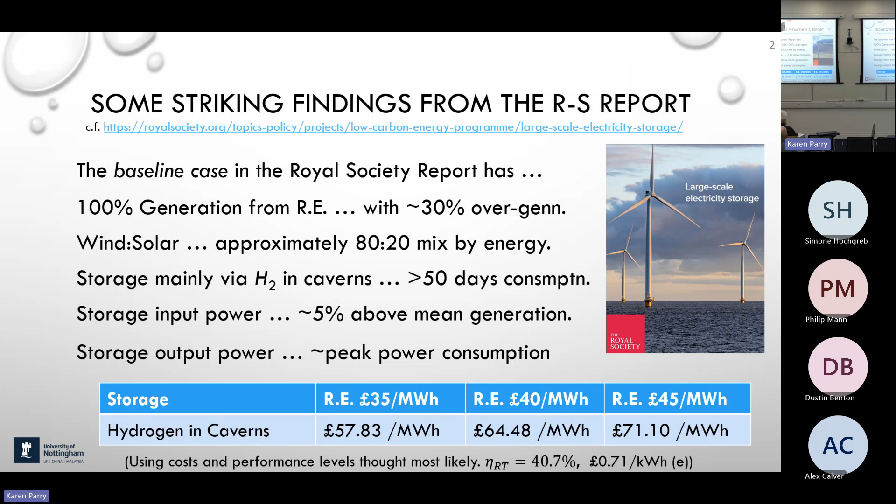I've plagiarized, in the finest traditions of academic life, 2 graphs directly from the report, because these are very succinct in explaining the relatively simple matter of why you need so much hydrogen storage. It's really got to do with inter-year, and Chris would say interdecadal, variability of wind resource. The slides will all be available, by the way, and these are plagiarized directly from the report, so feel free to photograph whatever you like.

So the first one is a version of the shortfall or excess year by year if you had scaled up supplies to be suitable for 570 terawatt hours per year of consumption. And the second one shows you the state of fill of the hydrogen store.

This is really insightful because the hydrogen store, first of all, stays full most of the time. That's quite an interesting thing, because what that tells you is that a lot of the time you are actually not able to put more energy into it, and therefore turnaround efficiency is less sensitive than you might think. Secondly, this is Chris's own writing, there's a very big gap between the time when you must fill up a store and the time when you must empty it again, potentially, for some of the bulk of that capacity.

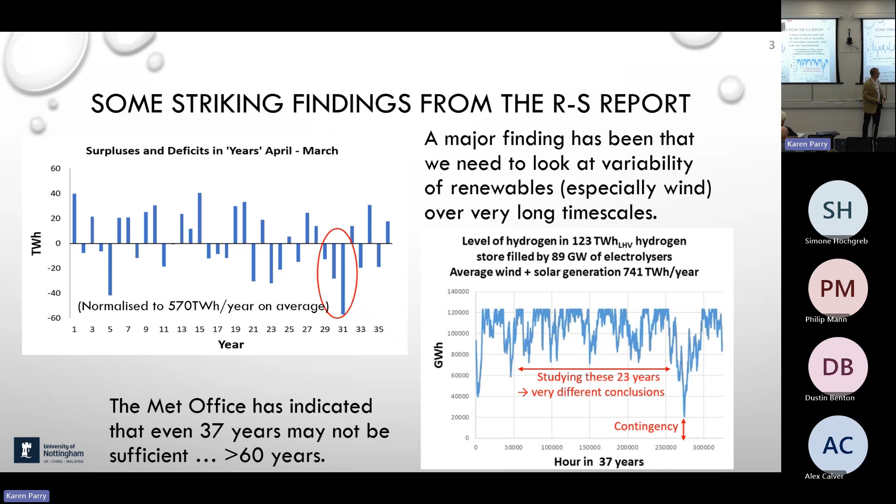So that's easy stuff, and that's from the Royal Society report. And if you say, so what? Well, the utterly obvious fact is the UK should already be preparing a large amount of salt cavern storage for hydrogen. It isn't. It's so incredibly simple to explain that, but it isn't happening. So that's unfortunate. We should be preparing for several gigawatts worth of electrolyzers and hydrogen-fired engines, or some other way to convert hydrogen into electricity, and we're not. Although there are intentions of 5 gigawatts by some target date, I can't remember that.

And the above two are not only essential, but they are no regrets. So even if we're not right about many of the aspects of cost and performance, there's almost no probability that these things will lead to regret. So we should just be doing them. And with that, I could stop there, and Chris would be happy if I did. You could say that's the answer. In my opinion, that's a part of the answer.

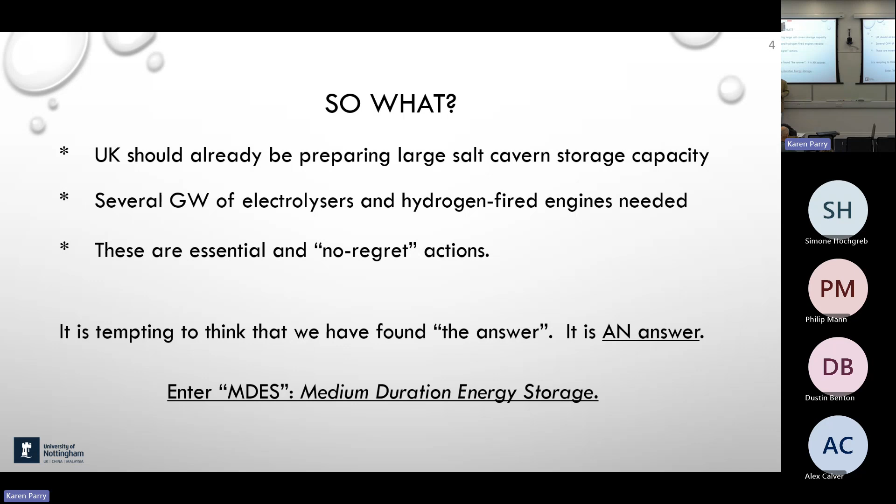The rest of this talk is about how you can make the answer better. Fundamentally, there's no point in making the answer better until you've got that message across first, which is where we're at right now, struggling to get that message across. However, I want to focus mainly on how you can make it even better than that.

This graph is what I hope people will recognize in a couple of decades' time as my signature graph. It doesn't have any numbers on the axes, and it's got very strange units. Along the bottom axis is the log base 2 of discharge duration, measured in whatever units you like, seconds let's say. The thing to note about energy storage is that the range of discharge durations relevant to us is colossal, bigger than any other dynamic range we commonly come across. It goes from seconds up to a couple of years.

I think it doesn't go beyond a couple of years, because if you think about timescales longer than that, you could just build more stuff. And if you think about things shorter than seconds, things like inertia and spinning rotors automatically sort that out. They're relatively simple, local effects, and you don't have to worry about them. But the ratio between a second and a couple of years is about 2 to the power of 26 — absolutely colossal.

On the vertical axis, there's a unit that's particularly difficult to explain. I won't attempt to unpack it completely, but it's the cost per semitone. If you're a musical person, you'll realize that a semitone is the 12th root of 2 increase in frequency. Because frequency has an inverse relationship to time, you can think about semitones in time as well, being a factor of 2 to the power of 1/12 more. So if we started with 1 second as the lowest discharge duration, we can go up to 2 to the power of 1/12 seconds, and so forth, et cetera.

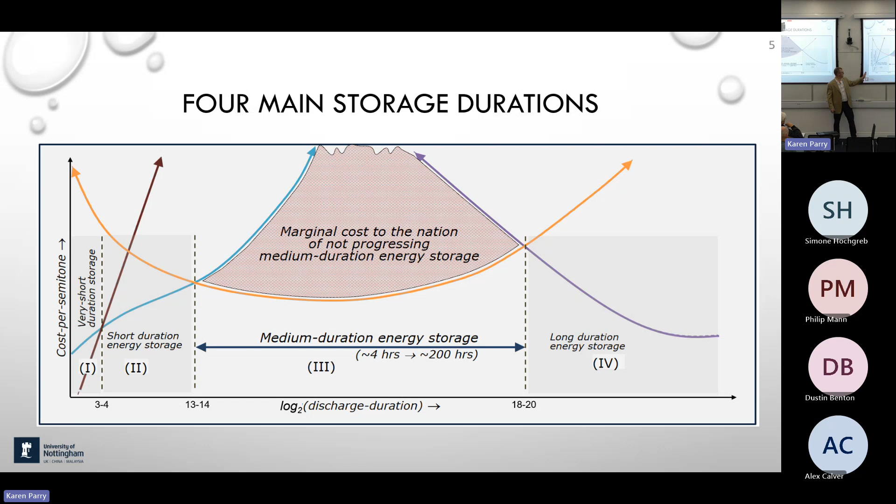In the middle between long and short is a whole set of times where actually you can address these using hydrogen if you want, but it's not a good solution because the cost per unit power is high and the turnaround losses are terrible. You can also address them using batteries, but they're not a good solution either, because the cost per unit energy storage capacity is too high using batteries. So there's a whole space here, and I want to mainly impress upon you how big that space is and how important it is.

Essentially, there are 3 sections in this talk — after that was the preface. The first one: I want to tell you about the distribution of energy that will come out of storage. You can chop it up according to the periods of continuous discharge from storage — that's the first message. The second one: I want to tell you about a tool that I wrote, first of all, to support the Royal Society report, and then thought, well, actually, I could tart it up and make it suitable for people to use independently of me. I wrote it for me to use in the first instance, but then I realized it's not hard to make other people able to use it.

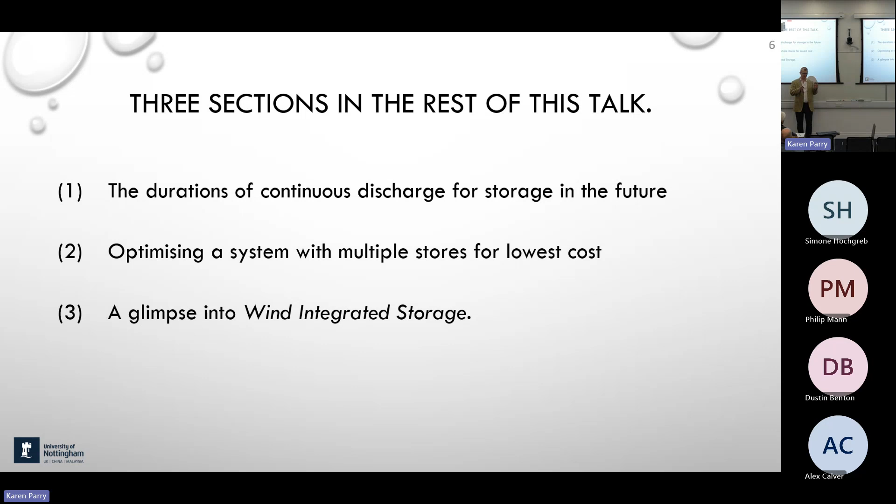And the final one, if I get this far without running out of time and interest, I want to tell you about my passion, which is one of those personality disorder issues: integrating energy storage right into wind turbines. And you're guessing what that means, and you're wrong.

It's similar to a graph, obviously not that one because of the years, but it's 10 years of what I call net demand. Net demand is what you get when you scale up the supply coming from wind and solar power, such that the amount of energy produced from the supply is a bit more than demand—in this case, 10% more. I call that 10% overcapacity. Then you subtract demand from that, and what you're left with is net demand, which is sometimes positive and sometimes negative.

So far, so good. In this case, because there's overcapacity, it has to be on average negative, because we're generally producing more than we need to draw out. We assume for the moment that energy storage is 100% efficient, just to get a rough idea about the shape of the problem we're addressing.

I want to focus on the positive bumps, the positive half cycles, not the negative ones. The positive half cycles are when energy is coming out of storage—that's when it's valuable. The negative half cycles are when you're putting energy into storage, and by definition, some people call it excess. I hate the term, but it's less valuable when it's going in. So the area we ought to focus on is this stuff that's coming out.

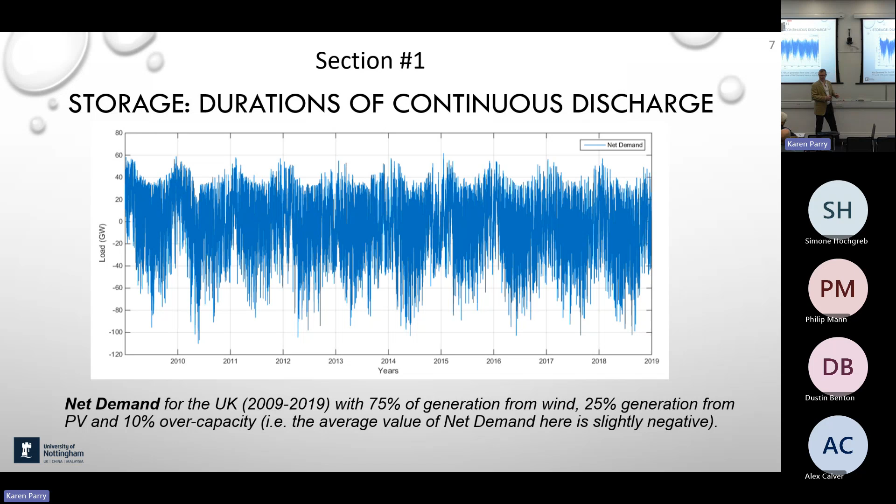You can do a very simple operation on that: zoom in on the graph and look at every place where net demand is positive, and ask how long did it stay positive for continuously. Each one of those bumps can then be categorized according to how long it lasted. It's quite remarkable what you find if you analyze how much of that energy came out in bumps shorter than 4 hours—less than 1%.

So the duty that falls most naturally to batteries appears to be less than 1% of all the energy that comes out of storage in that picture. Then look at the other end of the spectrum: how much comes out in periods that are continuously short for more than 200 hours, which is about a week, so 8 days—it's about 7%.

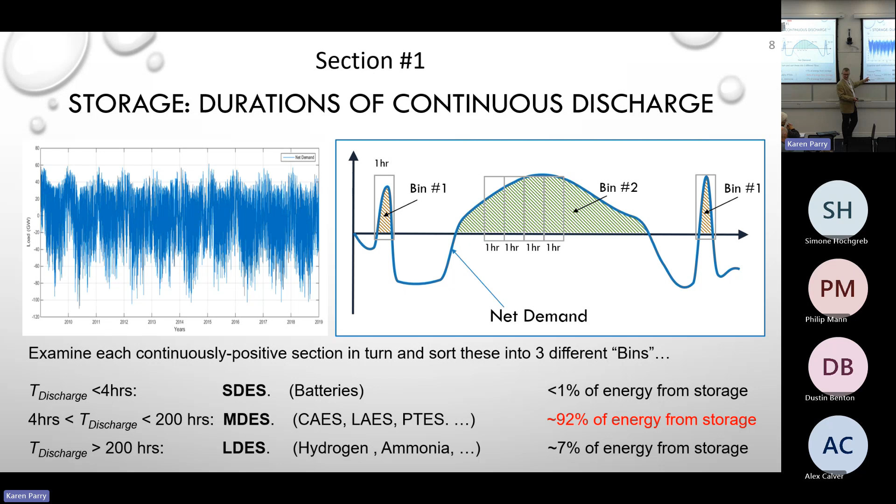That's quite surprising, but we get this word now commonly accepted by all of us, Dunkelflaute, a German word. A Dunkelflaute is basically something about 8 days long, 4 to 8 days long—a period of cold weather and no wind. We had one, actually we've just lived through one. And in the middle, all the action is in this medium duration range. That's a kind of interesting observation.

You can take that a little further and say, well, instead of dividing it up into 3 bins, I can chop it up into semitones if I want, as I proposed earlier on. This is it on a linear scale, giving you a probability density function, indicating for any 1 kilowatt hour that came out of storage, what is the probability it came out within a period of continuous discharge of a certain range.

Perhaps not surprisingly, you find a bump at around 12 hours, and that's because there's quite a bit of solar in this. You quite likely have a period of solar where you definitely don't need anything coming out of storage, then a period when you do, then solar kicks in again. So it's not surprising we have that.

I was puzzled initially by these—looked like harmonics of that—but it's actually quite easy to understand. If you ran short of electricity for 24 hours, you'll almost certainly run short for 36, because you'll be through to the next period when the sun isn't shining.

So there is actually quite a logical explanation for why these humps turn up, and effectively that just reinforces the message. You can put the boundaries on here. There's 200 hours and there's 4 hours.

I much prefer to present it now in a logarithmic scale. So you can think about these as the log of discharge time, and that is the probability density per semitone, if you want. In effect, what I've done is taken every vertical slice out in here, multiplied its magnitude, its height, by the average time.

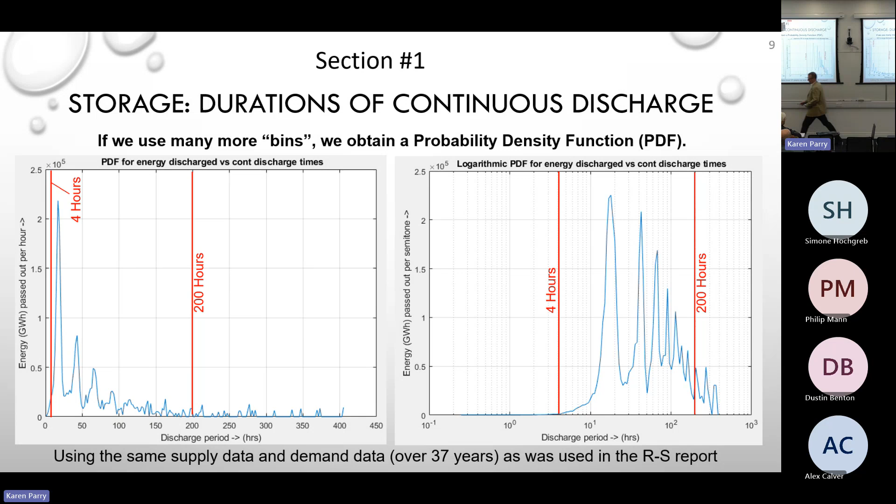So that's the end of section 1, and this is my imaginary friend Jim, and I'm putting words into his mouth. He's saying most of the energy supplied by storage in net zero UK will emerge in periods of discharge in this medium duration range. And he quite rightly tells me back that this doesn't mean that you should necessarily supply all of that from medium duration storage. You could do it with hydrogen and batteries.

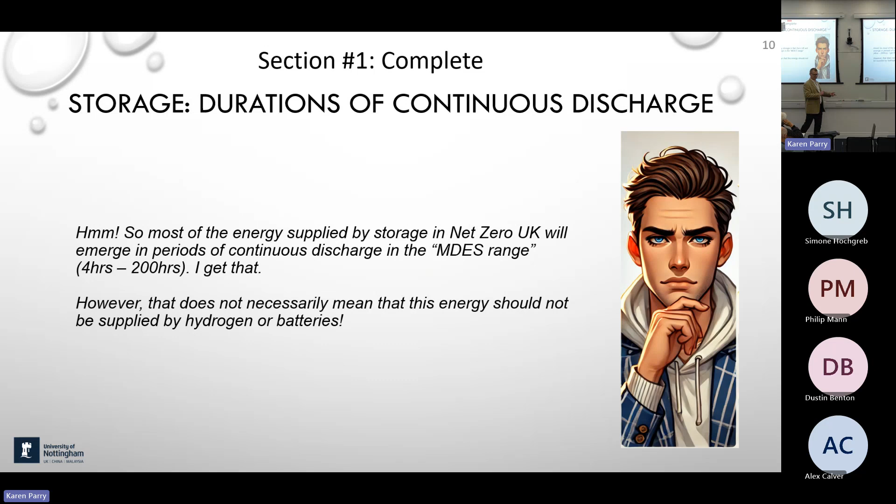So section 2: how do you go about optimizing a system that has multiple stores in it then? This is that piece of code that I told you about. I wrote a piece of code, I call it NStore Sim, for a very simple reason, that it's all about simulating a system that has N stores in it, multiple stores in it. And it's open source in not the proper way, but you can copy it and use it.

It's written in MATLAB and it's available at that link. It's a set of MATLAB functions with some example main scripts showing you how to use them, and some explanation videos. And at the core of it all is the idea that you can describe your system using a vector of parameters.

Which to you is going to say, how much hydrogen storage have I got in terawatt hours? How much electrolyzer capacity have I got? How much engines have I got to convert back out again? And then the same thing for other stores, that forms a vector.

And then you can calculate the cost, the minimum cost of the system that will work with that vector if there is one. As long as you pick sensible numbers in here, there will be a way to make that system work. You can calculate the minimum cost.

And if you can do that, you can throw it into a dumb optimization tool, which is in MATLAB, and it will crunch - for a conversation we were having yesterday, day before - it'll crunch for 2 days on a laptop and say, oh, here's the best you can do. So this is what NStore Sim does.

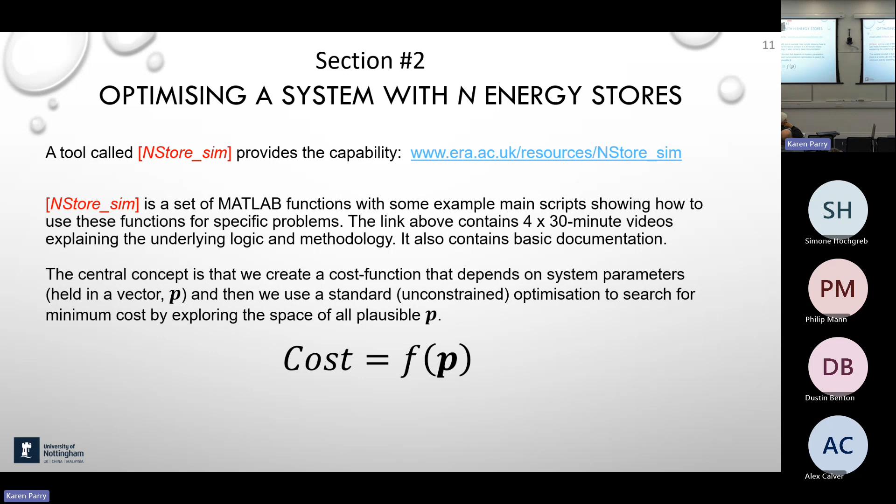You have to, for each type of energy store, tell it these things. What does 1 unit of input power cost? So cost per kilowatt. What does 1 unit of output power cost? What does 1 unit of storage capacity cost? And how efficient is it in round trip?

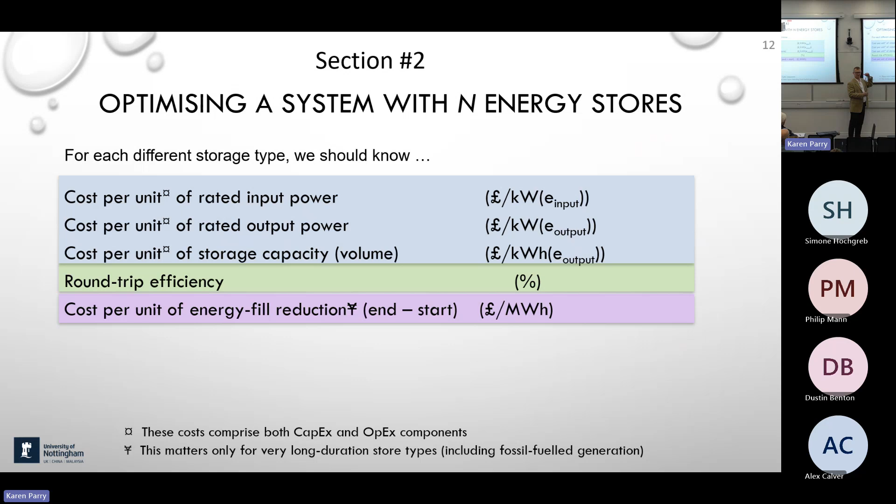And I don't care what it does inside. If I know these numbers, that to me describes it perfectly well for present purposes. And very importantly, you have to attach a cost to the difference between the state of charge at the end and the state of charge at the beginning. Because if you don't do that, you must constrain yourself to bring it back where it started. And that turns out to be quite an important freedom to have, to not require it to go back where it started. So that's broadly the information you need.

I'm going to show you how it works with a single energy storage system. You have, for a single energy storage system, 4 variables, but only 3 of them are independent. So there are 3 variables that are independent, and then there's 1 that's dependent. You can tell it how big is the storage input power.

You can tell it how big the storage input power is, how big the output power is, and how big the store itself is in volume terms. Then it can calculate, given those three things, how much overcapacity you need to supply all of the demand. If you make your stores very small, or low input power, low output power, and low capacity, you're likely to require a vast amount of overgeneration, possibly an outlandish amount. But as long as you make reasonable estimates, starting from a reasonable point, it will find a value of X such that the system works.

So far, so good. If I say I'm going to have 10 terawatt hours of storage, 30 gigawatts of input power, 40 gigawatts of output power, it might well be that some of that 40 gigawatts of output power could even be unnecessary. It's oblivious to whether it's necessary or not. It will say, in order to make this system work, you have to overgenerate by 25%, 30%, 40%, whatever the number is.

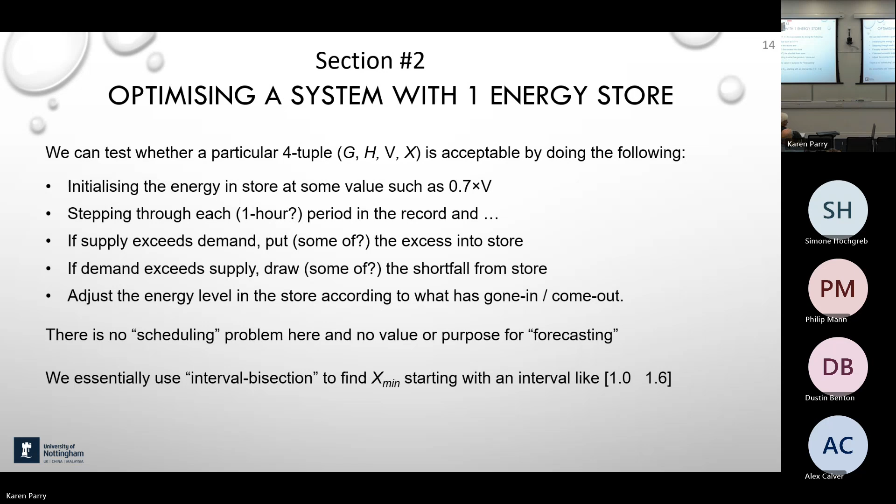So Chris basically did the same calculation that I did, but in a different way - a manual version of this for the single store case. This is the NStore sim version of the same thing, and actually these graphs look very similar, though they've got the axes flipped. But the NStore sim case enables you to deal with the multi-store case.

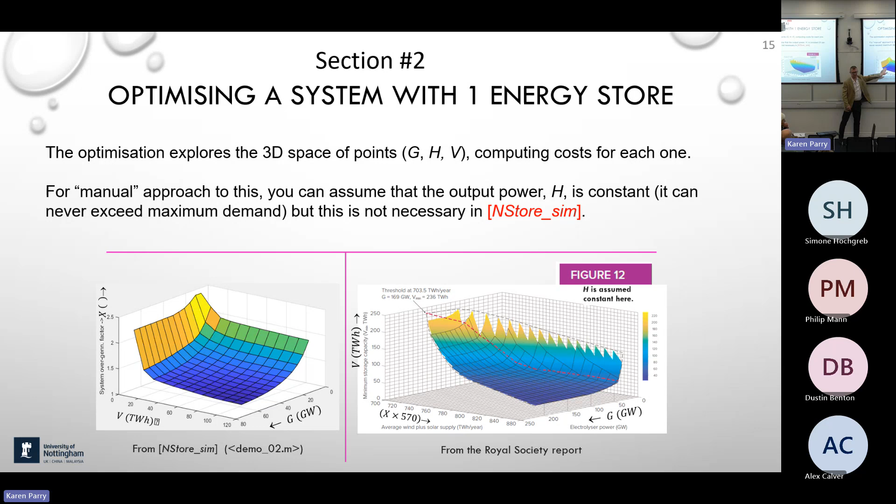And the extension to two or more stores is really quite simple. Instead of one value for input power, now you've got two - G1 and G2. Instead of one value for output power, there are two. Instead of one storage volume, there are two.

There's still only one overgeneration factor. These are the independent variables. You can set these, and then the simulation will calculate the minimum value of overgeneration needed. And nearly always it can find some value that'll be sensible.

And then it will calculate the cost. Since it can do that, you can go through the process of exploring the space, turn G1 up a bit, turn G2 down a bit, etc. You don't play any part in that. It's just dumb optimization, with no other need, as it happens.

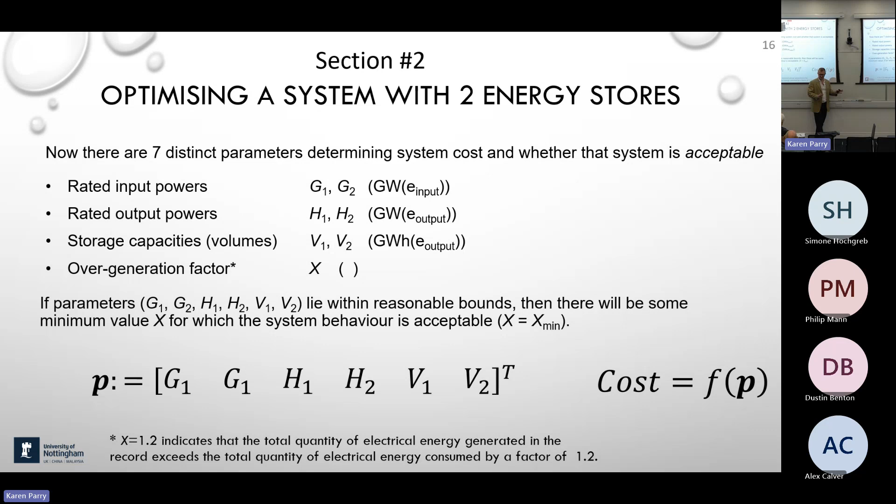This is how you test whether a particular 7-tuple, a set of 7 numbers in a particular order, works. It's very similar to testing whether a single store works, but there's a slight difference. You initialize as before with each store about 70% full, and step through every hour of the period as you would have done before.

If supply exceeds demand, you put some of the excess into store, but which one? And if demand exceeds supply, you draw energy out of store, but which one? So the difference is you now have a scheduling problem. You have to decide which store to supply preferentially or withdraw from preferentially. And there is a very simple version of that.

Use the most efficient stores as much as you can. That indeed was both Chris's initiative and instinct, and mine. And it's not right. It's not right, because if you do that, you'll take the most efficient store, and if you're short of energy, you'll empty it.

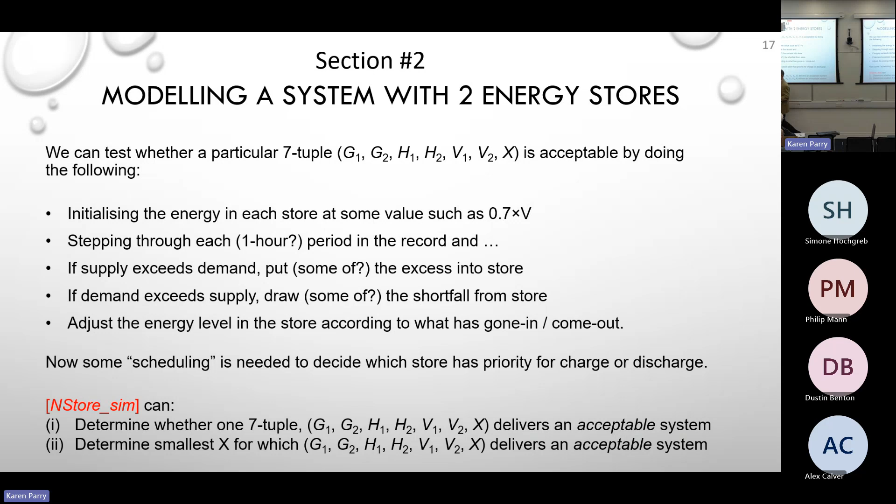Once it's empty, its output power is no longer in the game. You can't use that output power because it can't deliver you any more energy. So it's actually best to try to avoid emptying it, bring it down of course, but when you get to about 15% from empty, then try to use a less efficient store so that you keep that output power in play. And that's been formalized into an algorithm, because I've more or less explained it.

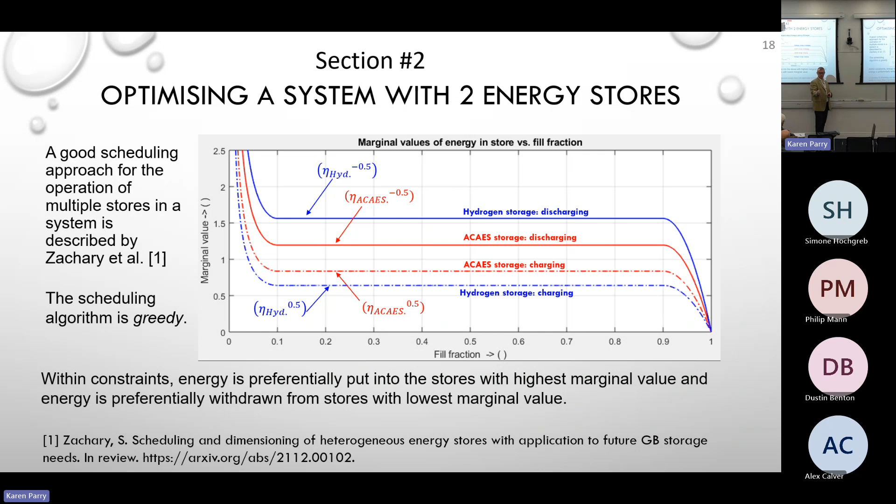And so here, when it gets down to about this empty, all of a sudden it's better to take energy out of hydrogen. It's just a formal way to make sure that you try to stay away from the buffers. It's like driving a bumper car around in a rink and trying not to hit the boundary, because if you hit the boundary, the power goes out of play, and you want to keep the power in play.

So that works, it's been implemented, and then you can start to think about grand ambitions. How do I optimize a system with n stores in it? Now you've got as many parameters as you want. All that happens is the compute time goes up. It's absolutely no more challenging to do it for 5 stores, or 6 stores, or 7 stores. For me, it just takes my laptop longer, and it's still a laptop job.

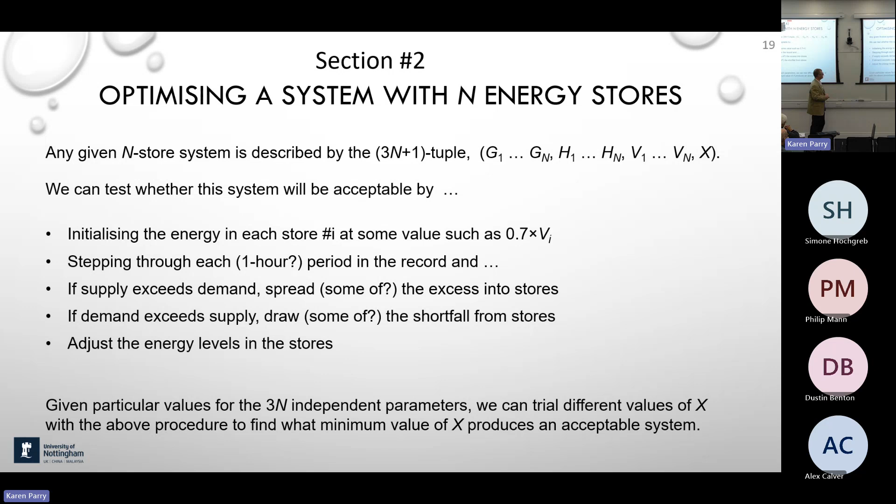You can still do this all very simply. It's the same routine that you had before. You initialize each store with about 70% fill, step through each 1-hour period in the record, and then, well, if supply exceeds demand, you do your scheduling. You say, which store do I put this into? And if it's the other way around, you say, which store do I take it out of? And you march your way through time.

So you wrap all this together, and it actually turns out to be very revealing. Here's a few conclusions from looking at that. I haven't presented all the numbers, I've just picked out some conclusions.

The first one: the blend of wind and solar matters a lot. There's a huge amount of misunderstanding with people using the word seasonal. The problem is not winter versus summer. This is greatly misunderstood. People think we need more energy in the winter - that's true, but that is not the driver for big energy storage, because the wind blows more in winter. So if we blend wind and solar properly, we already have approximately a year-round balance.

The big issue is the inter-year issue. If you get the right blend, 80-20, to make the seasons right, that's good in terms of not having a seasonal imbalance, but you're actually potentially pumping up the level of wind, and you're pumping up the level of interannual variability. So in actual fact, your best bet intuitively is to start by balancing the seasons first, and then back off a little bit on the wind, so you get a bit less year-to-year variability. That's the first interesting conclusion, I think.

You can examine whether nuclear power has a role, and Chris and I have come to a form of words that explains the conclusion here. It is almost a theorem. I thought initially that I could prove that if you postulated a system that ran only on renewables, and calculated that it could deliver power at 65 pounds per megawatt hour, let's say, then it was a theorem that if nuclear power cannot do that, it has no place. It turns out that you can contrive exceptions to that. It's a very good benchmark, but it's not a theorem. It gives you a very, very good benchmark.

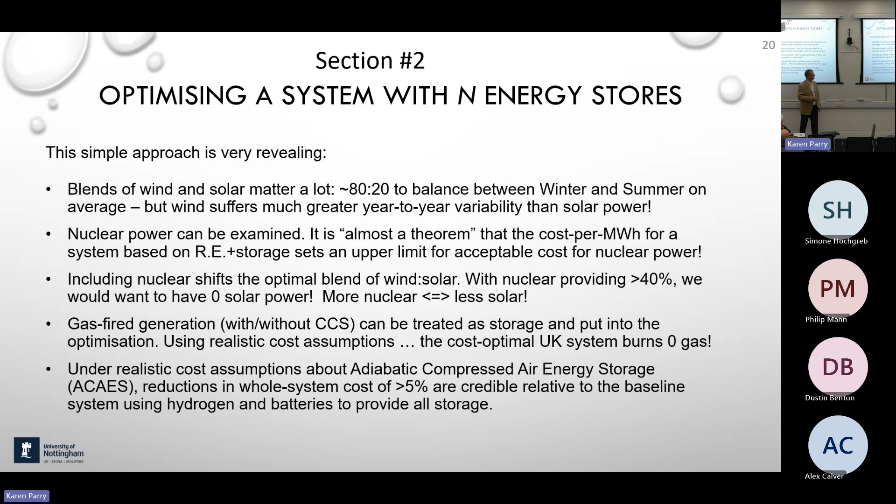We both tried very hard to find a simple answer to a simple question: how much is a compressor? How much is a 250 megawatt compressor? That shouldn't be hard to answer. It turns out that is hard to answer. We got the answer for electrolyzers within a factor of 3, and the answer for compressors has a factor of 10 associated with it. We could be very confident it won't get cheaper than £60 per kilowatt, and very confident it won't be more than £600 per kilowatt. But there's a very wide spread, and the reason for that really is because at the moment they're made as bespoke items - there's no industry for making 250 megawatt compressors as a standard object. And there's less uncertainty around the efficiency that you'll achieve with this.

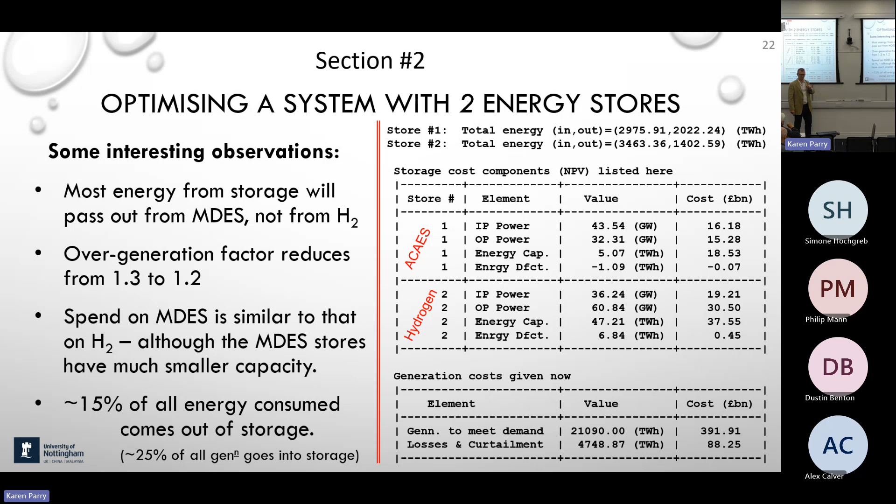And this, for part 3, this is really important. About 15% of all the energy that gets consumed has come out of storage. That means that about 25% of all the energy generated went into storage. That's a very key point because a lot of that energy came from wind power. And it sets me up very nicely for the final bit.

So here's Jim again, and this is Jim's observation: the cost optimization outcomes do seem to suggest that there could be a good role for MDES. But it's a pity about a high degree of uncertainty on costs and performance, costs particularly. And actually, I'm not sure if I've written a conclusion specifically about that. I do think that may be the biggest single area where more research is needed, because how do you determine how much a 250 megawatt compressor would cost if you were to be building 10 gigawatts of them?

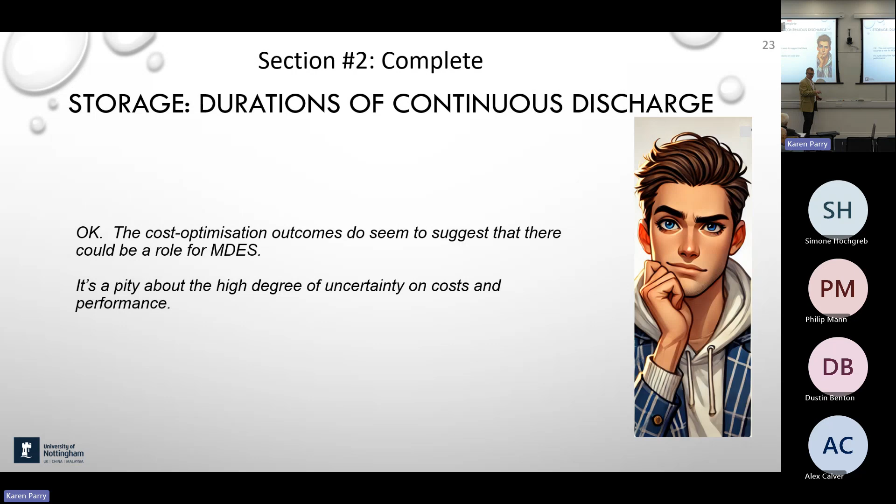There's no established procedure by which at the moment you can determine that. And I think if we knew the truth, it should be very influential on what we do. Right, so this is the final little bit, and I'm indulging myself here. I might curtail myself before the end, to use the analogy.

There's a few different varieties here, this is about wind integrated storage and some other varieties of medium duration storage. So I've mentioned medium duration storage, and there are quite a few technologies that could slot into that, most of which will be familiar to you. Flow batteries, everyone's heard of - it's 2 tanks of electrolytes that you flow in and flow back out again. The more tanks you have, or the bigger the tanks, the more capacity you can make. So you can separate the energy storage capacity from the power. That's a good thing, but they tend to be suitable for the bottom end, I would say, of medium duration energy storage. Still a relatively high cost per unit energy, so more focused down towards the bottom end.

And then all the rest of these are mechanical things, which is pointed out at the side. Pumped hydro, everyone knows - we've got a plant proposed in Scotland called Coire Glas that's been talked about for yonks. Pumped hydro is very, very mature, it's very good technology, it will last for centuries - which is a critical issue. I mean, all of these technologies will last a long time by comparison with electrolyzers and batteries, I would say, probably.

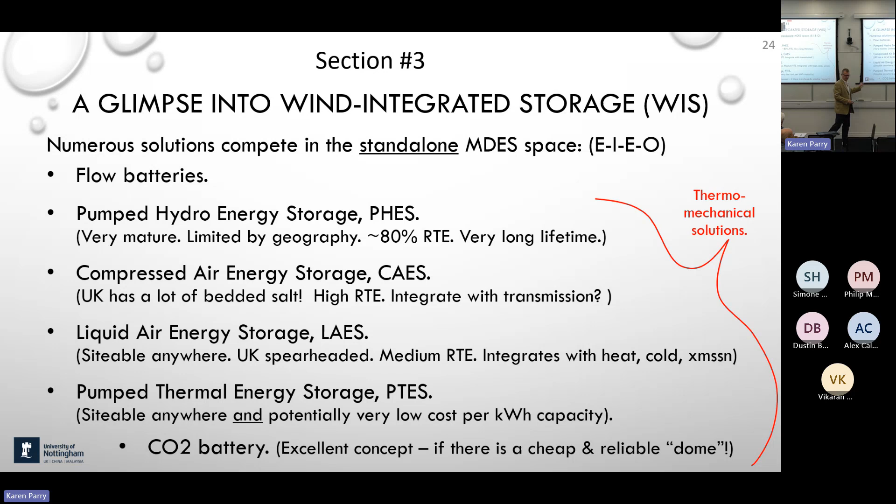This is the core of what I really want to talk about. We are going to get a massive fraction of our future energy from wind.

At the moment, this is the thought process that we have. We take in mechanical power, by the way, from a wind turbine - it's mechanical energy that comes in from the wind turbine rotor. We might or might not have a gearbox. There will be a generator, there will be a converter, and that's electricity here on this line.

And then we will use some of it - in fact, 80% or 75% of it, at least, will be used directly. Great, so it's about what do you do with the rest of it. Do you take 25% of all the energy that you've generated and convert it into something to store it, and then convert it back again to bring it out of store, at which point it's turned into 15% of the consumption? Because if you do that, there are some losses. The batteries can be a bit higher efficiency than that. Oh, I'm being quite generic - you're quite right, batteries of course, depends on what energy store you use. You couldn't afford - I mean, it would be eye-watering to do terawatt hours of batteries.

So if you did that, and that's the mind pattern that we're embracing at the moment, 25% of all the energy is collected and transformed from mechanical to electrical, primarily - that's what a wind turbine does. And then we'll transform it back into something, maybe not mechanical, but quite likely mechanical because of the durations involved. Wind power particularly does not switch on and switch off in 4 hours. Wind power stays on for a few days at a time and goes off for a few days at a time - it has time constants in that order. It's not short term, and it's not 200 hours that it stays on for either.

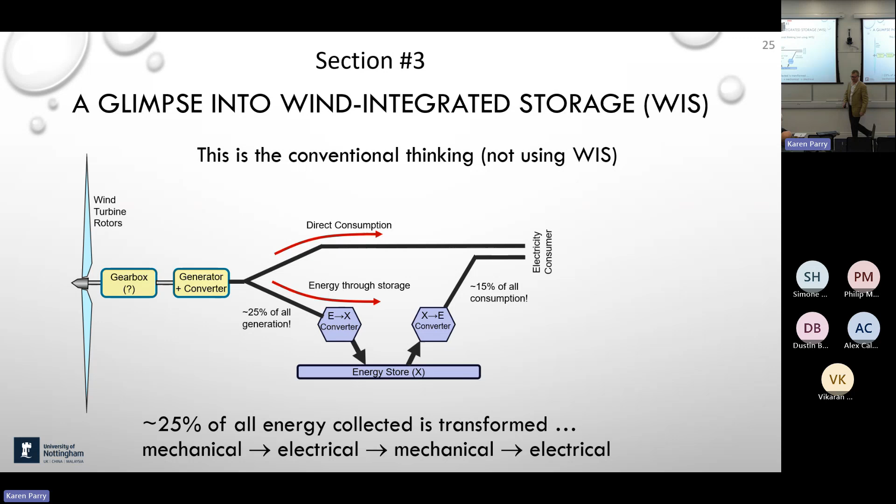So, bizarrely, the current thought process is we'll collect this mechanical energy, turn it into electrical, turn it back into mechanical when we put it through storage, and then turn it back into electrical again. Okay, you can do that, that's possible, but maybe there's a better way. And I think there is a possible better way, which is wind integrated storage, where you gather the power mechanically.

You might put some of it into a store in a form that's either mechanical or not far away from mechanical, by which I mean thermal. So the energy is either mechanical or thermal, and then you might combine them back together again. In that case you do two key things: you transform the energy fewer times, and you have fewer pieces of power conversion equipment. So there's an efficiency gain, and potentially a capex gain. There's also improved utilization of transmission lines—if you can make an offshore wind farm more steady in its power output, you can get the same energy through smaller transmission lines. That's also quite useful.

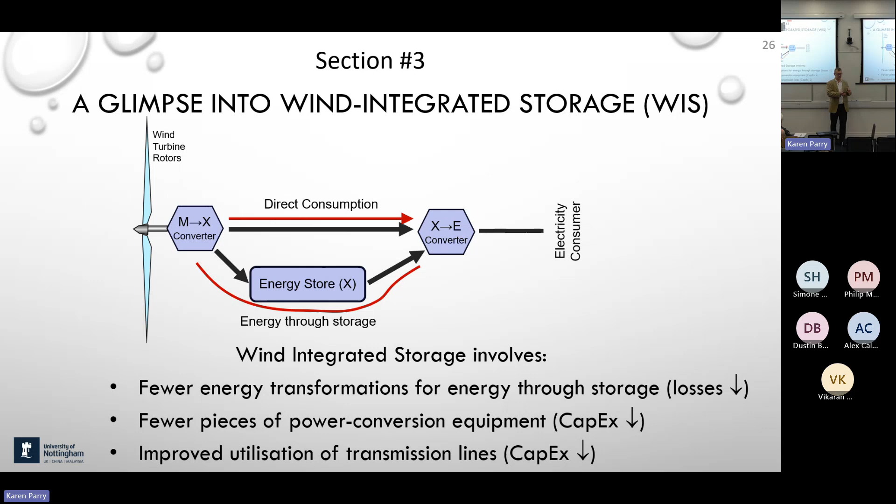If you put almost nothing through storage, you should use a conventional wind turbine for sure, because it's very efficient—about 96% conversion rate between the mechanical power in the rotor and electricity. Fantastic, conventional wind turbine, absolutely brilliant. But if you're going to put something like 40, 50, or 60% through storage, you're actually much better off to use an integrated system, because although it starts out less efficient, its storage losses are basically very much smaller. So you win. And you might say, well, didn't I say that only 25% is going through storage, which is sort of borderline?

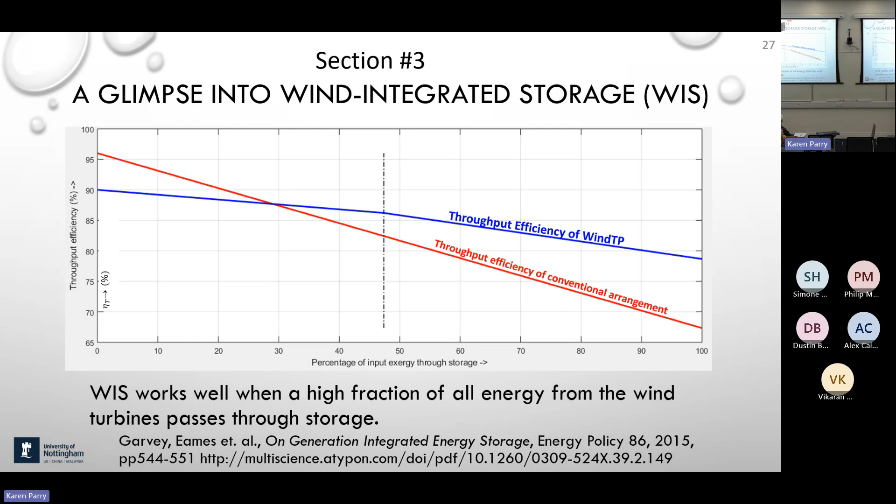Which is a very good point. But you shouldn't use this integrated storage for all wind turbines—you should use it for a small fraction of them, like a third. Then for those wind turbines, the amount of energy that goes through storage is much higher, and you're much better off to have had that type.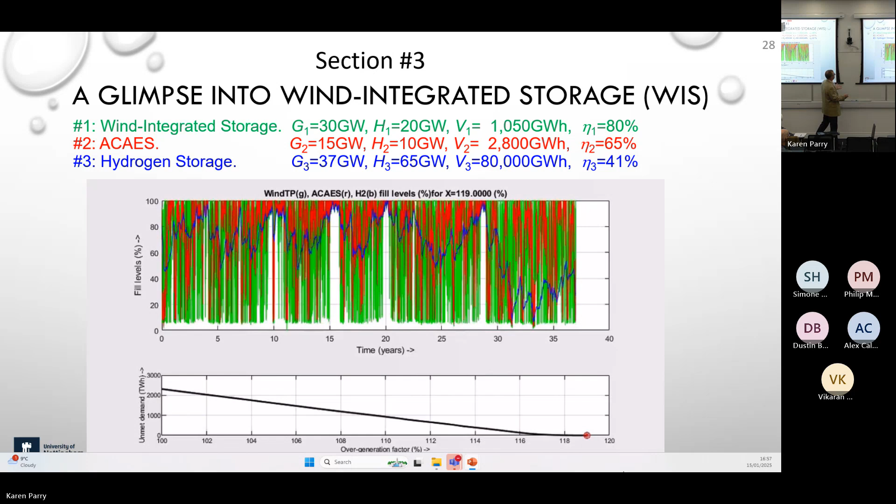As you have more and more over-generation, these things tend to lift off the bottom axis. The one going up and down most frequently is the green one, the wind integrated storage case. The next most frequently used is the red one. Just at this point, all of the fill levels have managed to stay above zero, and now you have met demand for the first time—that was with a 19% over-generation factor. It's really an illustration of N-store sim working.

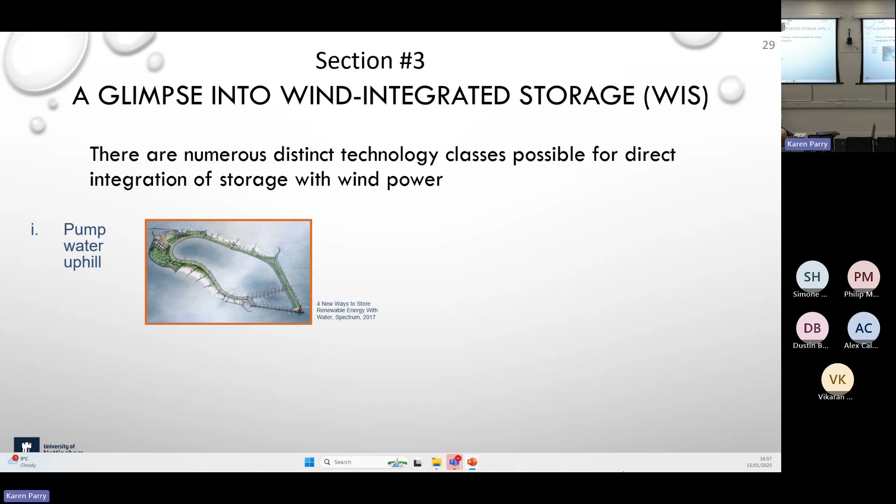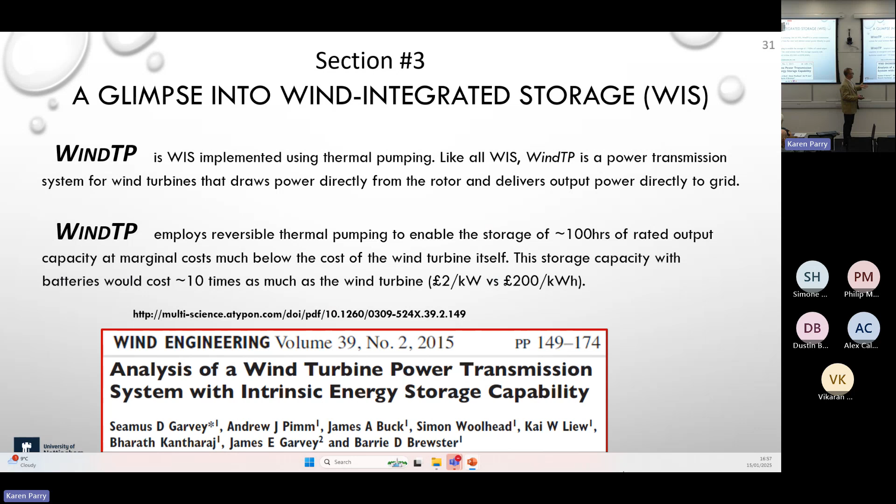I think I'll skip a few things and jump pretty much straight to the conclusions. There are several different ways you could do this wind integrated storage. This slide and the next enumerate those, but I'm not going to tell you about them all because there's one clear winner, one clear best, and it's my solution. That one is called Wind TP—thermal pumping built directly into wind turbines. That's an example of a paper from 2015 that describes this. Effectively, it builds two things into one system.

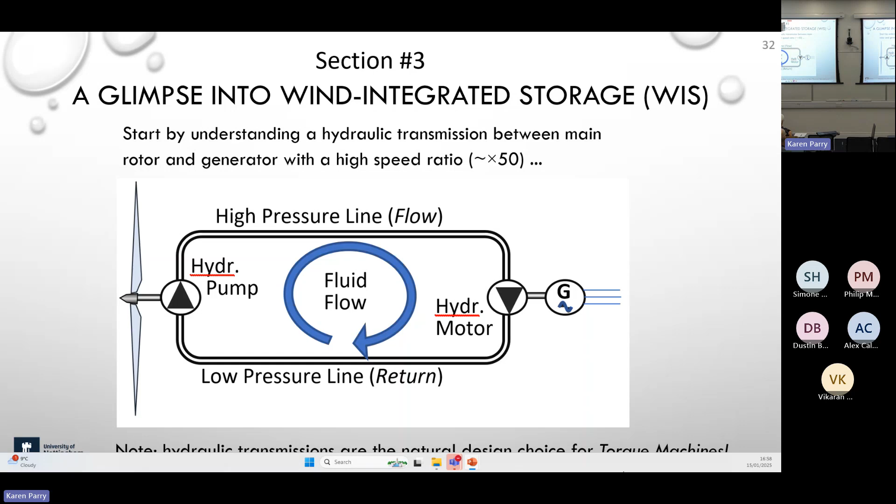And these have been built and they worked great. They were absolutely fantastic. Artemis built one. They just didn't have enough advantage relative to an electrical drive, direct drive.

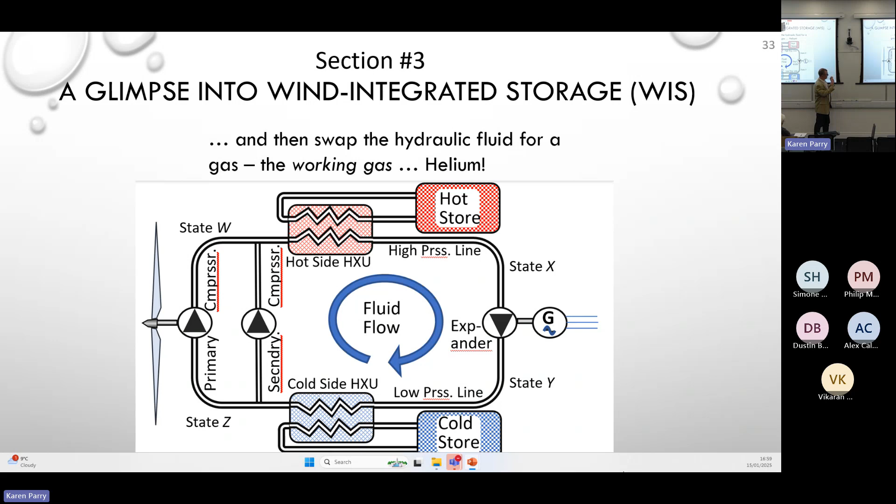So that's just the very edge of something. I'm going to show you a few pictures and then shut up. All of that is details. Here are some images.

This is an image of the WindTP compressor, and it's a very strange machine. In all probability, it's the most expensive compressor per kilowatt that's ever been built. It's also, I'm hoping, the most efficient wind compressor ever built. In a couple of weeks' time, I hope to confirm that I have won a Guinness Book of Records entry for the most efficient compressor ever built.

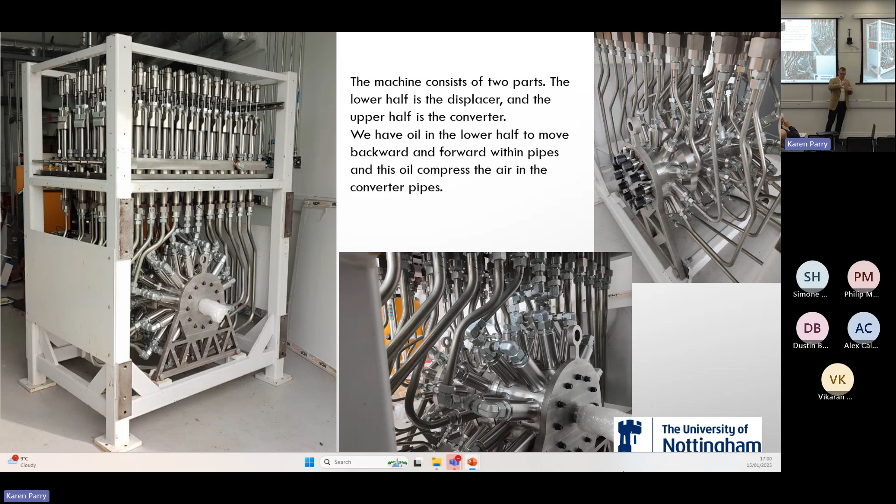It has to be the most efficient compressor ever built because of a very strange duty; it needs to have relatively low losses. The idea of it is very simple. There's a shaft here that you turn, that causes oil to be pushed forward and backwards inside these cylinders, that causes oil to rise up and down inside what I call organ pipes up there, and that in turn produces a liquid piston compressor. I could talk for hours on that, but I better not.

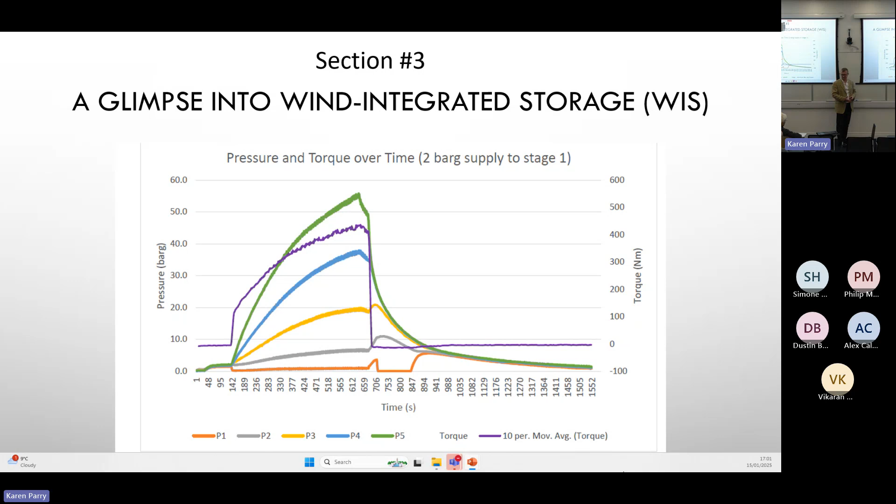So that's the first test. We have got it now up to 55 bar. It's aimed to go up to 500 bar. These are high pressures deliberately, but we are getting there slowly. This is why I don't have the good news for you that I hoped to have today.

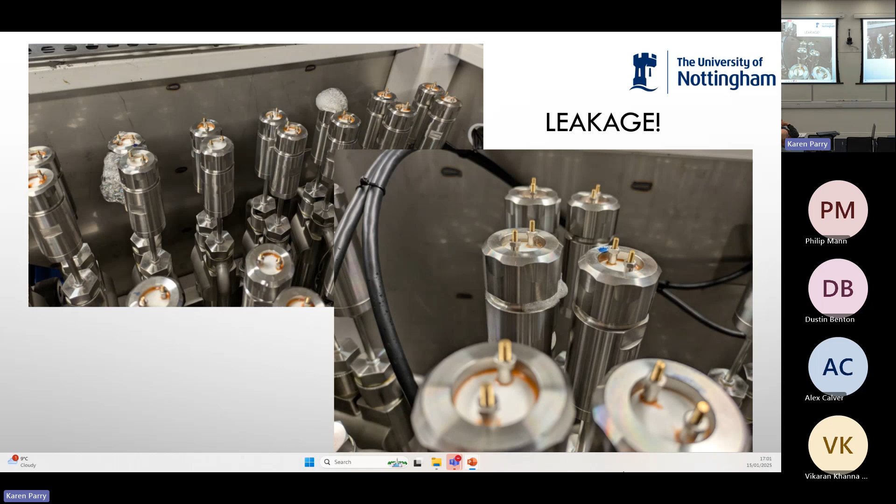So, in my opinion, with very credible assumptions, if you plug in what's possible with WindTP into Nstore Sim, I think it can account for a saving of more than £1 per megawatt hour. And I hear you say, so what? £1 per megawatt hour is not very much, arguably. It's not much compared to the cost of a megawatt hour, but I'll come back to that point.

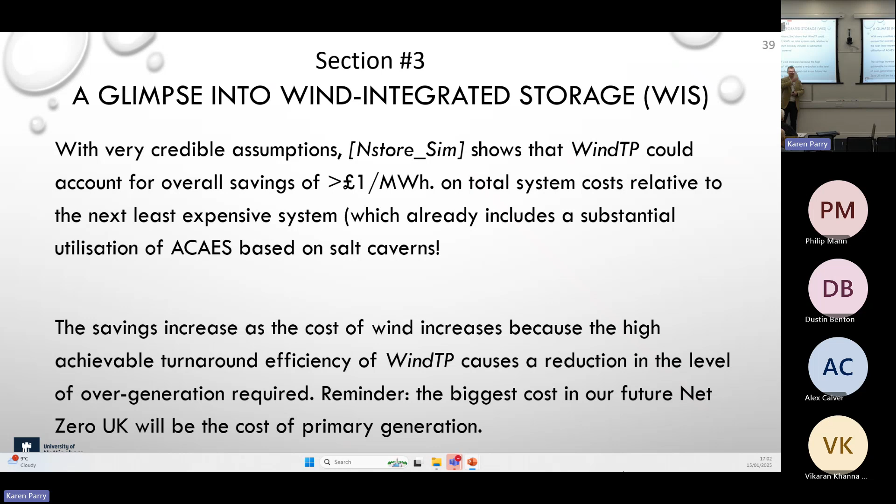If that £1 per megawatt hour saving was real, and if we consumed 1,000 terawatt hours per year, which I think is perfectly credible, then that would indeed be £1 billion a year for the UK. So in proportional terms, it's small, but in absolute terms, because we spend so much on energy, it's not small. And this is a deliberately provocative question at the end: if it was as good as that, surely DESNZ would already be looking into it seriously.

I could spend a month talking about that. So my concluding remarks: we do need a lot of hydrogen storage in the UK, no question about it.

Medium duration storage of various sorts will do the heavy lifting of future net zero UK. Standalone solutions like compressed air will give us an order of magnitude 5% reduction relative to just using hydrogen and batteries, which is the kind of default mentality of government at the moment.

And if you put this in, you're talking about 0.6% better than that, which to a politician sounds tremendously unexciting, but it's still £1 billion a year. And then WindTP is an attractive form of wind integrated storage that you can implement anywhere, et cetera. This is the UK Energy Storage Conference, and today is the last day for submission of abstracts.